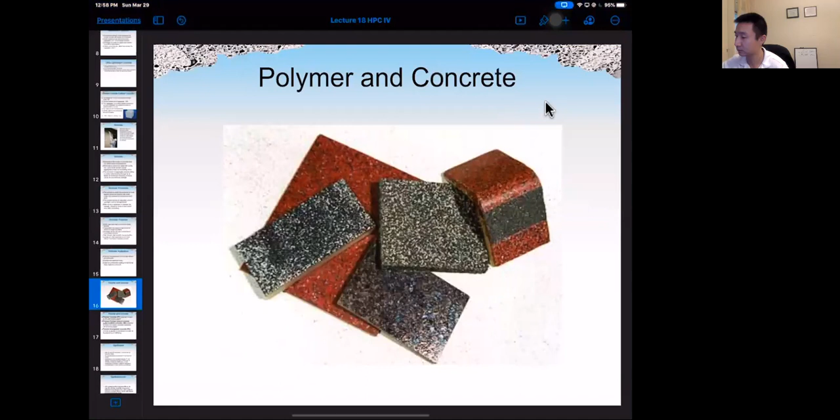So for polymer concrete, actually we have three different types of polymers and concrete. So we have the first one, polymer concrete, in which polymer is used as the only binding agent. There's no cement, there's no water, only polymer and the aggregate.

The second one is called polymer Portland cement concrete or latex modified concrete. Okay, so this is the concrete similar to traditional concrete, but we add polymer as a type of admixture. And the polymer also replaces part of the mixing water. There's cement, there's mixing water in this latex modified concrete.

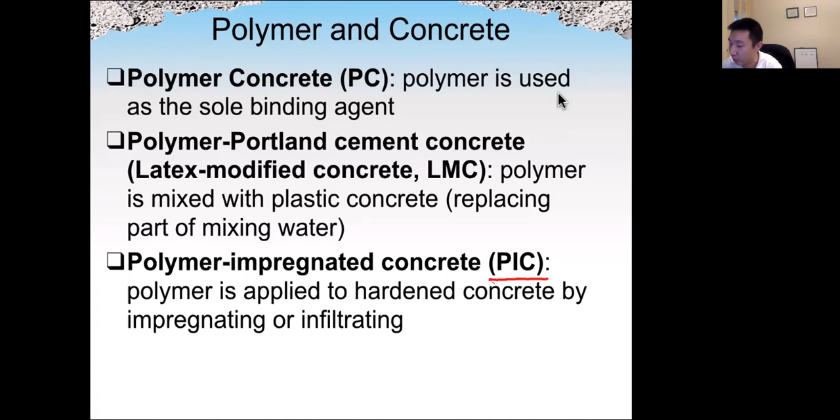Last one is called polymer impregnated concrete or PIC. This is the concrete which is cast as traditional concrete, but later on we dry the concrete and we impregnate polymer into the pores and the cracks of the concrete to improve the performance. Okay, so this is the third and last one.

So here is a little bit of history about polymer and concrete. Both polymer concrete and latex modified concrete have been used for more than 70 years, since the 1950s. Polymer impregnated concrete, PIC, has been used since around 20 years later, the 1970s.

The strength of polymer concrete can be very, very high, as we can see up to 20 KSI and even higher, which is around 140 megapascal. It can achieve the strength within hours or even several minutes. This is very different from traditional Portland cement concrete, which will normally take 28 days to achieve more than 90% of the final strength. And because of that, we normally use polymer concrete in emergency repair jobs.

So latex modified concrete has very good bonding ability to existing old concrete, and can also provide very high durability. So harmful solutions cannot easily penetrate to do damage in the concrete. Because of that, we mainly use latex modified concrete in overlays on floors and also to do the rehabilitation of deteriorated bridge decks. So that is latex modified concrete.

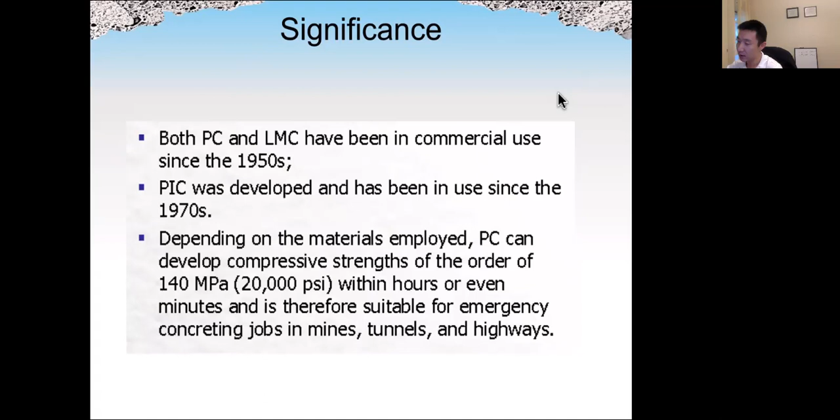So polymer concrete, which is the first type of polymer and concrete, is a mixture of aggregate together with polymer as the only binder, the sole binder. And because the cost of the polymer is much higher compared to other raw materials, it is important to achieve the maximum possible dry packing density of the aggregate, because when we enhance the packing density of the aggregate by using different sizes and better gradation, we can reduce the amount of liquid, which in this case is the polymer, to fill all the gaps. So we can reduce the amount of expensive polymer.

Another important factor for polymer concrete is the aggregate needs to be oven dry. There should be no moisture on the surface or inside the aggregate. The reason is that the polymer does not like moisture. Remember, this is for polymer concrete only, which means the concrete does not have other binders such as water and cement paste, only polymer and aggregate. In that case, we want the aggregate to be totally dry.

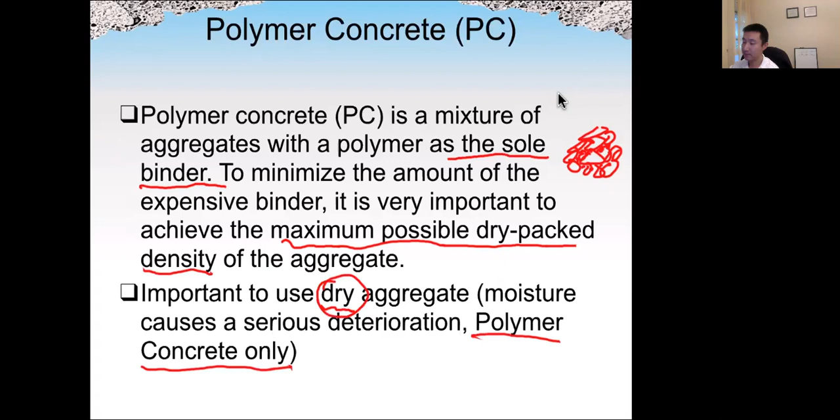There are different types of binders available. As we can see here, different types of binders such as MMA and so on. And they have different properties and performance depending on the strength and also the setting time.

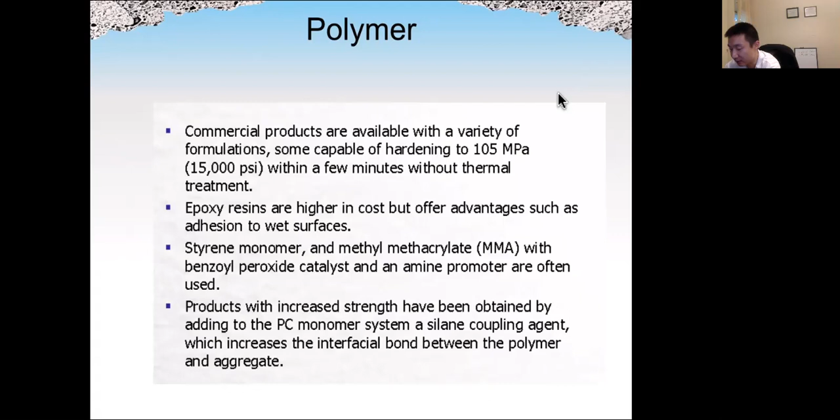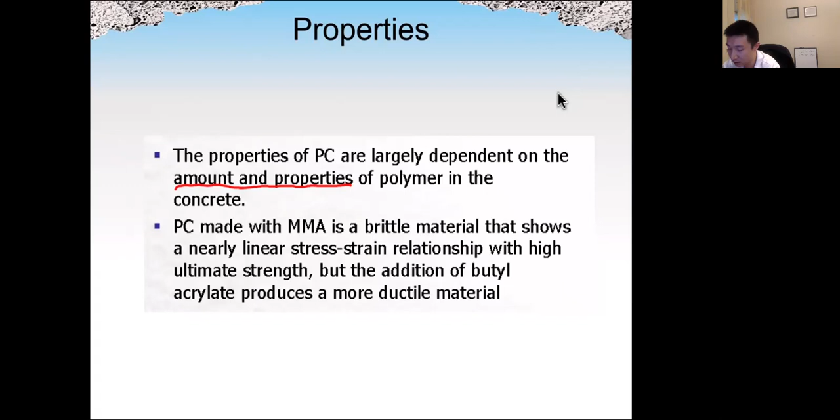The property of polymer concrete, as we can imagine, largely depends on the amount and also the property of the individual type of polymer we use in the concrete. For example, polymer concrete made with MMA is brittle, as you can see from the figures in this slide. Here shows the stress and strain curve for polymer concrete. This is MMA only, or MMA with 5% of butyl acrylate or 20% of butyl acrylate.

As we can see, for these three types of polymer concrete A, B, and C, the final strengths and also the modulus of elasticity are very different, as well as the post-peak behavior. For MMA only, the material is very brittle, so after the peak load, there's almost sudden failure. But for C, after the peak load, the concrete can still resist a certain load. So the toughness of this concrete is much higher compared to A, MMA only. So by modifying the composition and percentage of different polymers, we can change the performance of polymer concrete quite a lot.

The figure on the right shows plain concrete versus polymer impregnated concrete. We can see polymer impregnated concrete has much higher strength. And also the E value, which can be seen from the slope of the stress and strain curve, is much higher for polymer impregnated concrete. So higher E value and also higher strength, but it is more brittle. Not too much deviation from the straight line for polymer impregnated concrete, but for traditional concrete, the E value changes over the different strain, and it is less brittle compared to PIC.

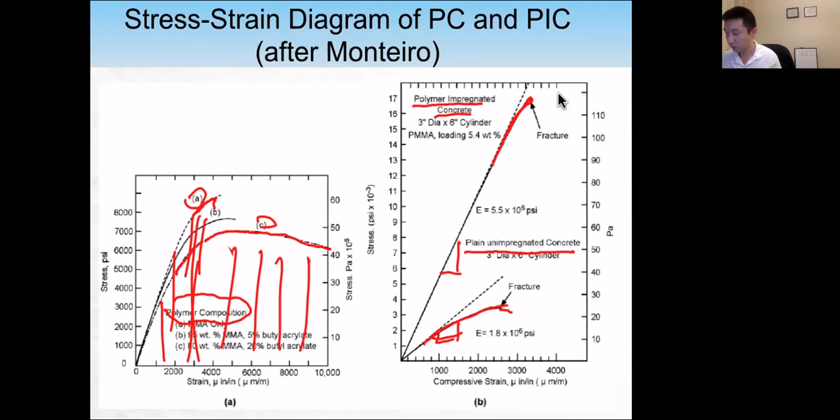So the property of polymer concrete: it has definitely higher strength and also good chemical resistance, higher initial strength, as well as higher modulus of elasticity. So we use this type of material for emergency repair and overlays. We use it for overlays because the cost of this material is much higher, so just a thin layer on top to enhance the strength and prevent the penetration of harmful materials into the concrete.

The thermal and creep properties of these materials are not as good as traditional Portland cement concrete. It is susceptible to high temperature, which changes performance, and also the creep is much higher. Because of that, we need to reduce the loading stress level to less than 50% of the ultimate strength.

For sustained loading at a stress level of 25%, it did not reduce the ultimate stress for a loading limit of 1,000 hours. So we need to reduce the requirement, considering the higher creep for this type of material. So it has larger long-term deformation, but it may relax, which could be a good thing because relaxation may cause stress redistribution in the reinforced concrete.

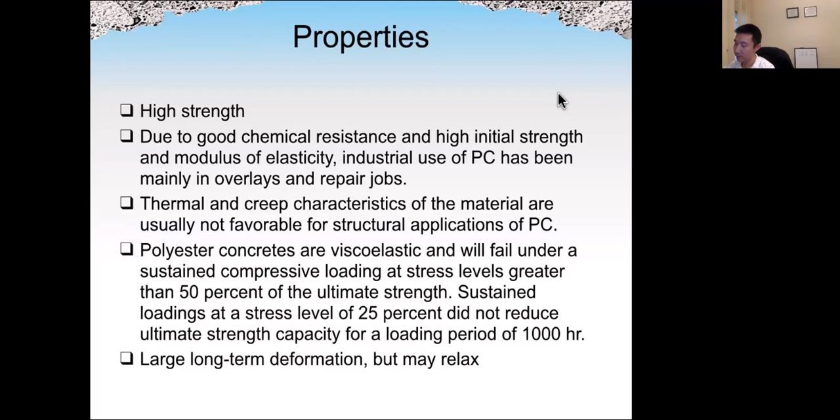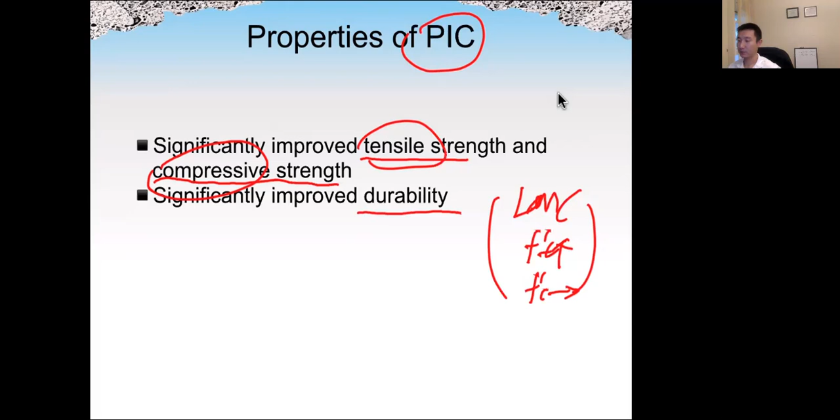All right. So in summary, we discussed three types of polymer concrete. They are polymer concrete, which uses polymer as the only binding agent. Then latex modified concrete, where latex is basically a chemical admixture in normal concrete. And then polymer impregnated concrete, which is a treatment of traditional concrete after it hardens. We use monomer to penetrate the concrete and then polymerize the monomer to seal the cracks and the pores.

So they are fast setting, and can achieve strength within several hours or even several minutes. The strength generally will be much higher compared to normal concrete, but depending on whether we talk about tensile strength or compressive strength, different polymer concretes have different performance. And also low permeability: for all three types, permeability will be much lower, which translates into better durability.

However, remember polymer concrete is sensitive to temperature and UV light, and also creep will be much higher compared to normal concrete. Finally, remember polymer concrete is very expensive, so we only use it in situations such as overlays and emergency repair. So keep that in mind.